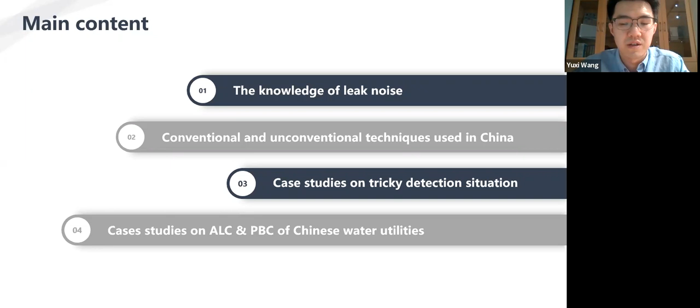So first section, the knowledge of leak noise. What's the component of a single leak noise? In fact, you can say it's kind of like a piece of music that's mixed up with all kinds of frequencies, from low frequency to middle frequency to high frequency.

As you can see from the diagram, it's composed of 4 parts. You will have some vibration from the pipe, water flow, and the impaction when the water jet comes up from the hole to inject the background soil. At last, you will have friction when the water jet is coming out from the hole—friction between the hole and the water body itself creates some noise. So basically, we have 4 types of noises that mix together to create a leak noise.

I'm going to show you 3 types of real leak noise. One is from the cast iron pipe, the second is from the PVC pipe, and the third is from the lead pipe. I'm just trying to turn down the noise so people can hear it clearly.

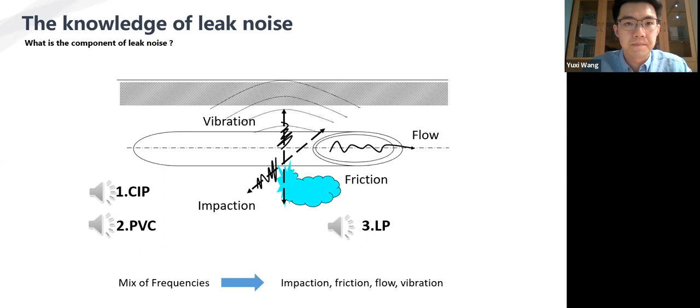To find the leak point, you have to use all kinds of tools to help you listen and find the leak noise. There are many parameters that have a main impact on leak noise. I list three main parameters.

There are water pressure, pipe material, and the third one is the burial depth. Those three parameters are, as far as I know, the most important three parameters that can affect the leak noise. From the left top diagram, as we know, the FAVAD N1 equation shows that when the pressure is getting higher, the leak rate is getting higher.

So we will have more or less a proportional relationship between the water pressure and the leak rate, and it's the same with sound intensity and water pressure. As you can see from this diagram, you will have a very steep gradient of increasing from 0.1 megapascal to 0.3 megapascal, and the leak noise will quickly become much louder. Until we reach 0.4 to 0.5 megapascal, it's getting slower. But overall, the sound intensity or loudness of the leak noise is getting louder when the water pressure is getting higher.

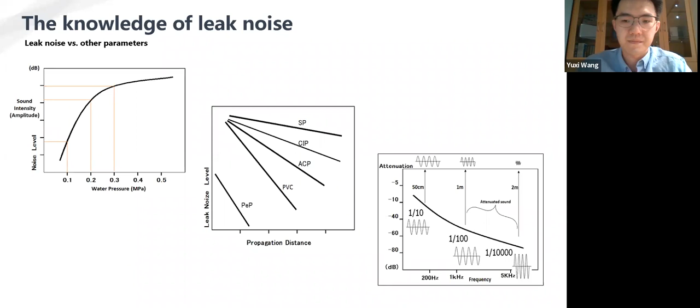When we try to pinpoint leak location, we will always encounter two kinds of noises as well. The first one is fake noise, and it will happen anywhere around the world. There are at least 4 fake noises. The first one is the power transformer, which is quite a common situation when we're doing detection activities in China. And we have water flow, and sometimes we can hear the water meter.

And there's also sewage sound. If the sewage is quite close to the water mains, you can also hear the sound from the sewage. So let me just show you the sound of each one.

This is quite common in China when doing detection work in living districts, where we have lots of buildings and apartments with air conditioners and other things, including the power transformer on the street. When we try to use the ground microphone to pinpoint the leak noise, we can actually hear exactly the same noise like this. But it's easy to cut off, because sometimes the main unit has a function, like a special filter, to cut off this kind of low pitch.

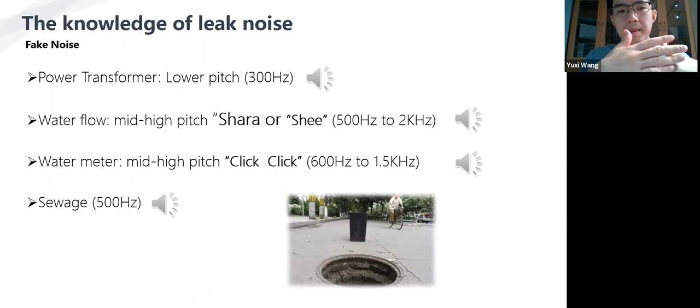So these are the 4 fake noises I listed on the presentation. In the real situation, there are more fake noises that we encounter during activities, but those four noises are kind of the typical fake noises we have in China.

So the second one is the mixture of leak noise and background noises. I have no idea how the background noise level would be in other countries, especially in European countries. When I was studying in the UK, of course, the streets were relatively quiet. But in China, as you see from the diagram, we usually do work during the daytime, especially in traffic jam time, and sometimes even at night after 12 o'clock, or theoretically between 2 and 4 in the morning, the most quiet time. The streets are still noisy in some certain areas. So we usually hear the leak noise together with background noises. It's always like that - we don't really hear any pure leak noises at night. There's always some dog barking, people walking on the street, or motorcycles coming through - all kinds of situations. So let me show you 4 mixtures of leak noises and background noises to give you some idea how the sound would be like under these certain situations.

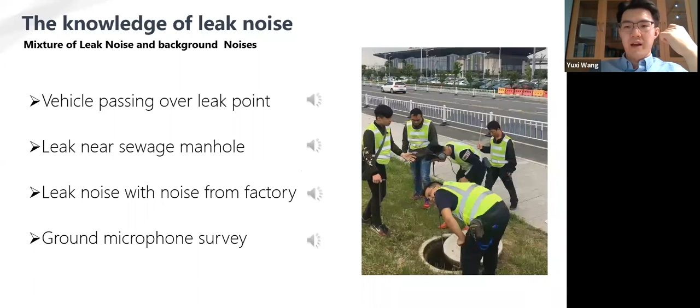So it's very clear that the closer you get to the real leak point, the louder you will hear it from your headphone. This is a very interesting sound clip.

So the second part, after talking about some basic knowledge of leak noise, we're going to present some conventional methodologies and tools, and also some unconventional methods we've used in China. Leak detection work in China can be tracked back to the 1970s, and the most professional, official leak detection work really started in the early 1990s.

Before talking about conventional methodologies, for every water leak detection job in China, we always follow 3 steps: the area survey, to find the leakiest area, and then the line survey, where we shrink the range from an area down to one pipe, finding all the leaky pipes and which pipe is leaking. And then at last, we focus on the point on the pipe. So it's like a zoom-in procedure, from the big suspicious area down to one suspicious point, and then we use special ways to pinpoint the leak and fix it.

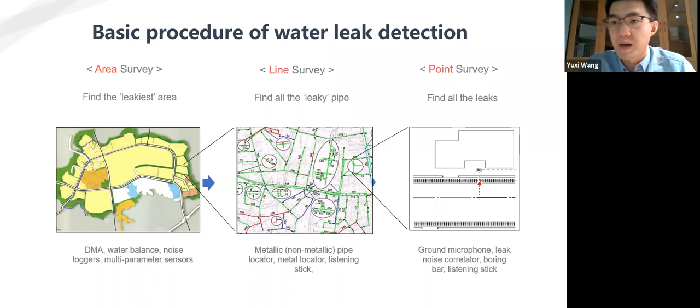I will talk about more during the boring bar slide, and also the boring bar will combine with the listening stick together to pinpoint the point.

For the area survey, we have tried the very classic lift and shift for the noise logging method, and it's still used in China at the moment. We basically install all the loggers on the pipe accessories, drive a car, and use a special receiver to receive these noise values. Then we go back to the computer to see which area is red, yellow, or green, and if an area has a leak alarm, we go and check.

It's good that when you have a relatively small block, like in Japan, to use the lift and shift, and also in the UK, or maybe in Singapore and Thailand, it will be very convenient because the entire water demanding area is smaller. So you can easily get those data by driving a car or something else.

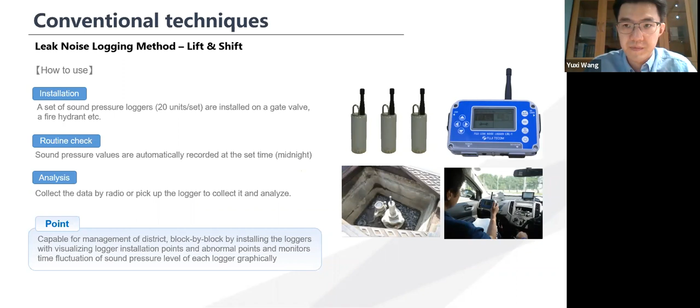But in China it's different. For example, in Beijing we used to deploy 3,000 loggers back in 2008 during the Beijing Olympic Games, but that only covers just around the Olympic Stadium. For the entire Beijing city, maybe we need 100,000 or more to cover it.

Considering the cost and also the driving situation in Beijing, the traffic jam, we tried the classic ways for many years, and we finally realized that maybe the traditional ways are not really suitable for China. So we developed our own smart method.

It's similar, we have the logger here, and we use two ways. We have NB-IoT, the narrowband Internet of Things, and we have a base so we can use it to transfer the logging data back into the computer. So there's no people needed to pick up that data.

Or we can use LoRa to get the data, and then it will automatically show on your pad or your iPhone.

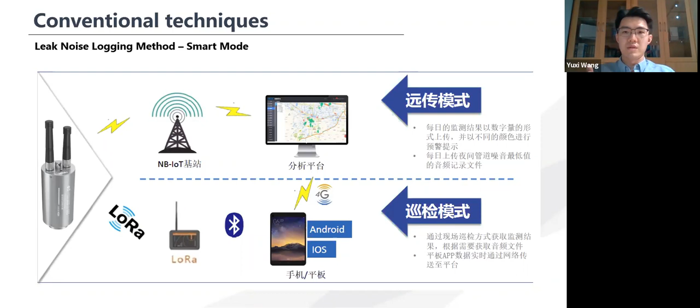Everybody is trying to use the 4G network because it's faster, saving more time to receive these noise logging data.

So when we define a leaky area, then we have to zoom into the pipe section. We use the listening stick, the manual listening stick, on the water meter, and we put it on the fire hydrant.

Sometimes in China, especially in the north and east area, we have very deep manholes. We have to use the ground microphone with a special magnetic pickup sensor, with an extended long wire to put the sensor into the manhole and listen.

Or we can use the extended listening stick. We sometimes have 4-meter long listening sticks specially designed for those ultra deep areas, and also the electronic listening stick, used to listen on water meters and other pipe accessories.

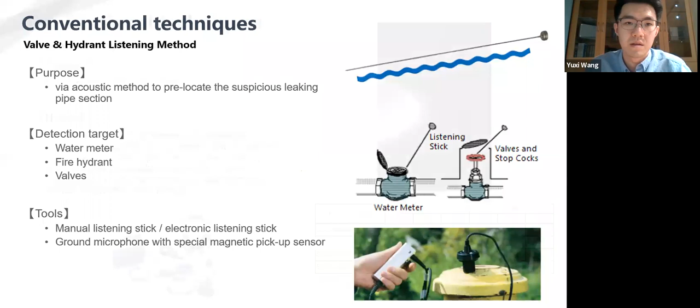So when we find the pipe section, then we have to use the ground microphone. In some areas in China, the water utilities don't use the ground microphone, they use listening sticks and leak correlators instead. They don't really trust the ground microphone.

But the ground microphone is actually very useful, and it's also frequently used in China. I can guarantee 99% of water utilities in China will have at least one ground microphone to do the survey. The whole purpose of using the ground microphone is to pinpoint the leak point.

Usually in night operation, for different pipe materials, the pickup point on the pipe is different. For example, if you have a PE pipe, the pickup point between each position is about 50 centimeters or even shorter, maybe 30 centimeters, because the noise propagation distance is very short. And if you have a steel pipe or a galvanized pipe, then you can walk longer, maybe 1 meter or 2 meters at each point.

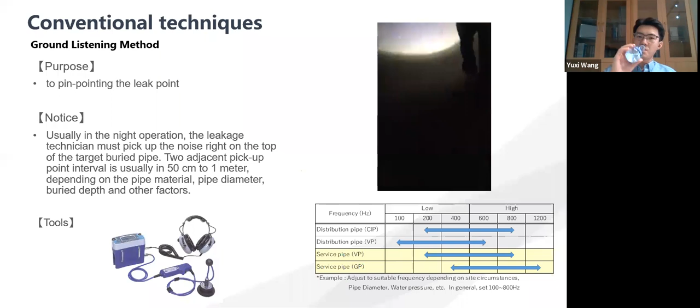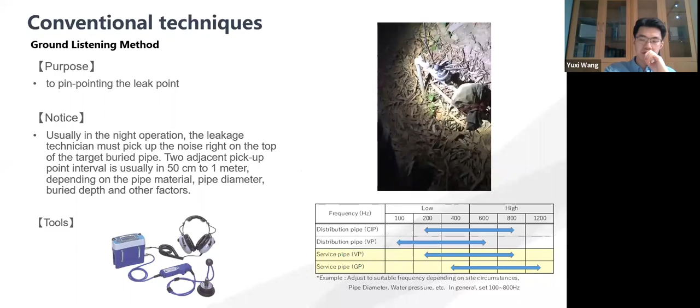The video clips I'm showing you now are at the normal speed of a proper Chinese leakage technician when he's doing the survey. It's not a show off. It's just the normal speed when the technician is so familiar with the area and also the leak noise.

He will work very fast to listen for the leak noise using the ground microphone. And you can also hear the dog barking. It's so common in China at night, so I guess the technicians are just so familiar with that.

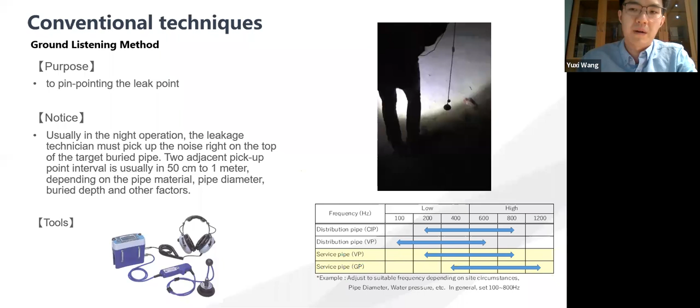You can hear me just chatting with him, and it's okay for him, he just walks and picks up the noise for 1 second and then walks along. The pipe material in this video is a galvanized pipe, so he probably has more confidence to hear it.

The other type of pinpointing the leak location is to use the leak noise correlation method. This method has been developed since the 1970s, originally designed in the UK, and then the rest of the world started learning this method. It's a very good method, but only when you have the correct pipe information. For example, you have to know your pipe diameter, you have to know the distance of the pipe section, and you have to make sure the noise can transmit to the two sensors.

Otherwise, there will be an unsuccessful leak correlation. Also, the situation where we use the leak noise correlator is when, like the pipe, there's a building sitting on it, or if there's an ultra deep pipe, or if there's too much background noise in your detection field, then you can use the LNC method.

There's one tricky situation when we refer back to the bottom diagram here about the correlation peak. For every type of LNC device, we will receive a correlation peak. Sometimes when we excavate, we will see a dry hole, and that's the situation when you will see a fake noise or a fake peak.

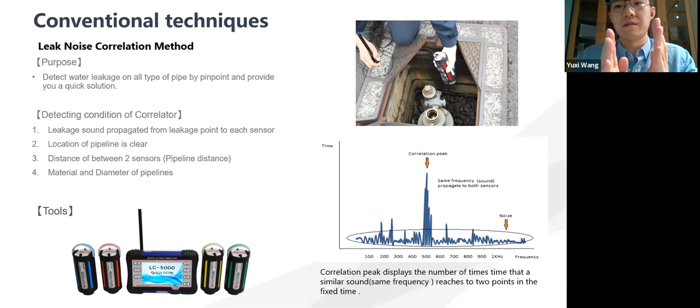So the boring bar method especially applies to in the northern part of China, from Shandong province or Henan province, and to Beijing, and going to the eastern side to eastern China. And some of you might know that in northeastern China, the pipe burial depth can be as deep as 5 or 6 meters.

And so under this kind of situation, even if you use the leak noise correlator combined with your ground microphone, sometimes you're still not sure if the leak point is there. And also because it's so deep, when we do the excavation, we spend more time and more labor force, and we have to dig a very deep hole. So considering all these situations, we decided to apply this boring bar method.

The purpose of using the boring bar method is to minimize the excavating area as small as possible. The reason Japan uses this method is because the block area there is very small - they have small streets. It's not like in China, where you find a point and then excavate like 40 by 40 centimeters or even a larger area. In Japan, it can't work like that. So they developed a method to minimize the area and save more time and labor force.

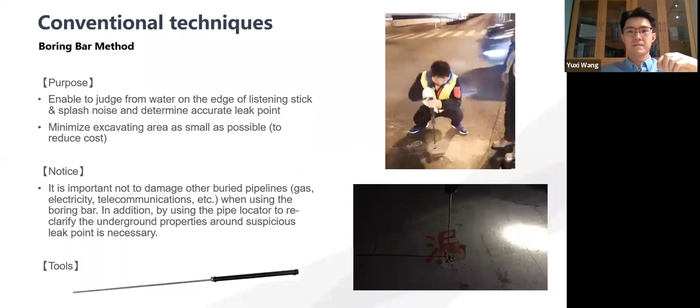So this guy is almost done with the boring bar method. Originally he should stand up and use the boring bar to push it down to get a hole. Just bear in mind that when he does this procedure, he knows how deep the pipe is. If you don't know how deep the pipe is, don't use this method, because you're going to break the pipe immediately.

So the second step is when we complete the borehole, we put the listening stick inside it. Let's just check.

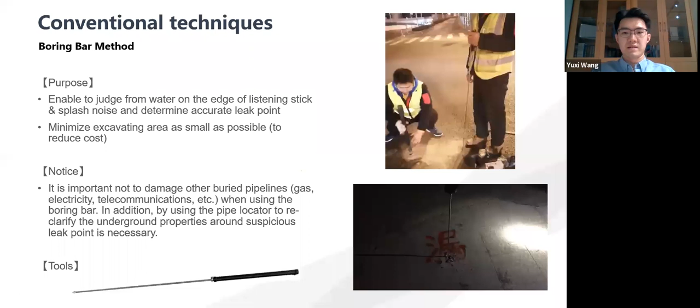So just to give you an idea, the Chinese word in the background means leak. You can see the listening stick is shaking under the high water pressure - this must be a leak point, and it's right on top of the leak point where you get the loudest noise. You don't even have to put your ear on the listening stick - you can already hear it through the phone recording the video clip. It's so loud you can't miss this point.

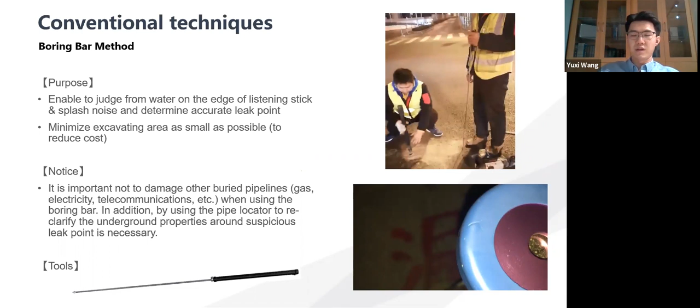So those four methods are the typical methodologies we use in China to find a leak point.

At the same time, we have also tried different unconventional detection techniques. The first one we tried is the Sahara. I first heard about Sahara back in 2015, from Pure Technologies. They've done quite a few case studies in China.

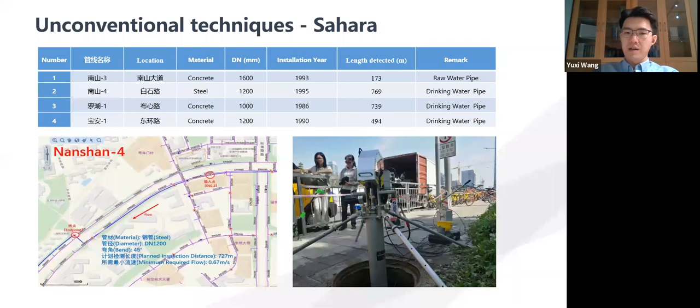This is one of the case studies in the Shenzhen area. You can see they did 4 lines totaling about 2.2 kilometers in length. The result is they didn't find any leak point, but they found a couple of butterfly valves and some blockage using this Sahara method.

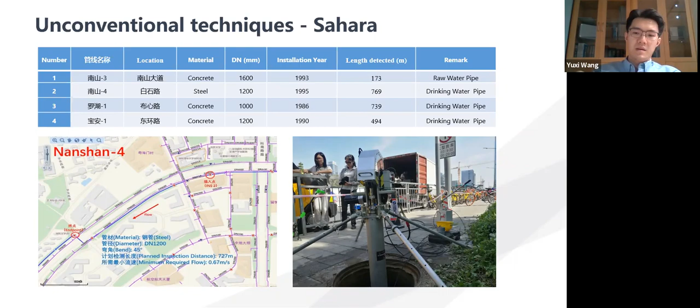And also at the same time, they tried smart ball. They find a couple of leaks, two leaks, and one leak is a simulated one, and they find it. They also find some airlocks or gas bags in the airlocks. They found a few of that, and this is also a very huge pipe, a DN 1400 water main. So they did a trial on that and found two leaks and a few airlocks.

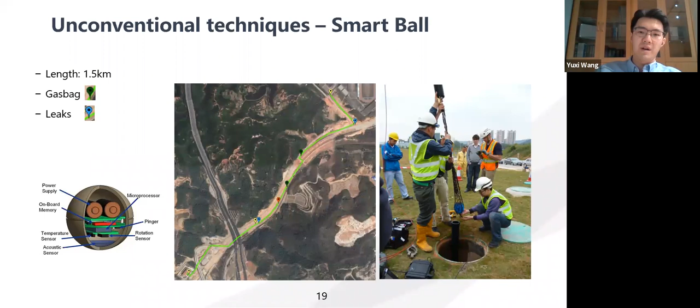And also for Sahara and smart ball, it's the same issues. First of all, it's the cost. I'm not sure how much money the European water utilities will spend on doing one smart ball or Sahara project, but in China it's very expensive. And to spend that amount of money and find less than 10 leaks, well, I can say the water utilities will not really accept that.

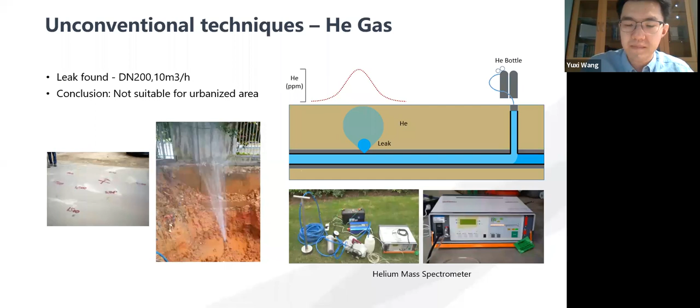So finally, there's the satellite. I've been reading some papers on satellite technologies. There's one company in Israel and one in Australia, I think. They both use satellites to detect the differences between the soil and... I forgot the term for that. But as long as you've got water on the ground, on the surface, you will have a POI, point of interest.

This method is totally a new idea, because they don't need DMA, and they don't really need to send people to do some kind of survey, because the satellite can do everything. But there are also some issues with the satellite. First of all, the range of the satellite is still too big. As far as I know, it's 200 meters as a radius. So when you have a radius like that, you still have to send people to walk around and do the survey to try to find the leak points.

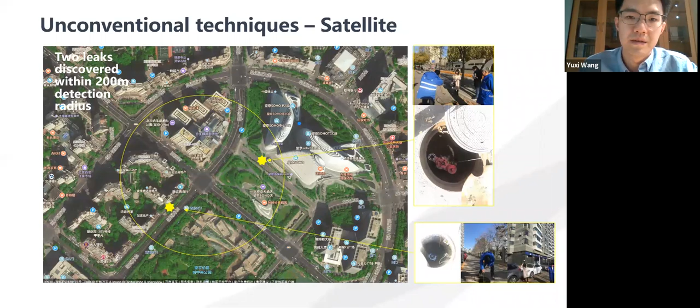So in China, I think there are more tricky situations than any other countries, because we have a large population. We have lots of construction work. Our street changes every day. We always see sometimes poor construction work, and also the background soil is not that high quality. So we have more tricky situations, and I'm going to show you 2 or 3 tricky situations we have, and it's very, very hard to find the leaks.

So large diameter, as I mentioned, it's tricky because the noise will not go very far. For this example, we have a 1000 reinforced concrete pipe, and it's relatively deeper, 2.5 meters. The reason I use this case study is not only because the sound propagation distance is short, but fortunately we have 2 pipe accessories on the water main, so we can use the leak noise correlator.

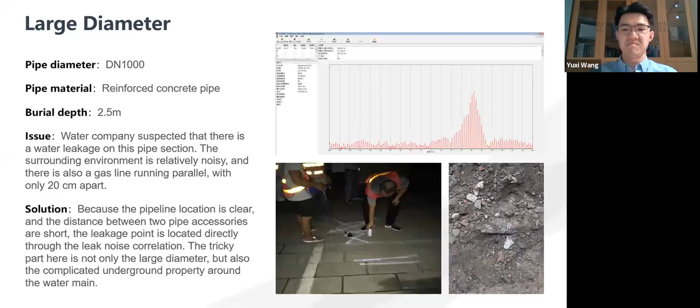And yeah, so it does. You can see the 2 lines here. This is actually the gas pipeline, and here is the leak right down there. So you can see how close the main pipe, water mains, and the gas line are. And this is the big point here, a very tiny leak point. This is how important it is to know what's buried underneath near your water mains. Otherwise, it's going to be a tragedy when doing the boring bar method, or even excavation directly. You will break the gas line, and then bad things happen.

And we have an ultra deep PE pipe. It's 8.1 meters. Believe it or not, it's really 8.1 meters deep. We also have a 7 meters deep PE pipe was found before. And why it's so deep is because of the backfilling of the soil. They dig out the road and then backfill the soil and then dig out again and then backfill. Several times of construction works. So the road is getting thicker and thicker and thicker. So your pipe is getting deeper and deeper because you got too much soil on top of it.

And the worst situation is this PE pipe doesn't have any tracer wire or any other traceable probes on the pipe. So basically we lost the pipe. We actually lost the pipe, and we can only see something or get some idea through the manhole.

So the first thing to find the leak is to find out the exact location and buried depth of the pipeline. So we use the copper wire with the signal rod, or we can say it's a Sonde, to make the entire pipeline traceable. So we know we are working right on top of the pipe, and we also know this is an 8.1 meter deep, very deep pipe. So it's going to be hard to pinpoint a point.

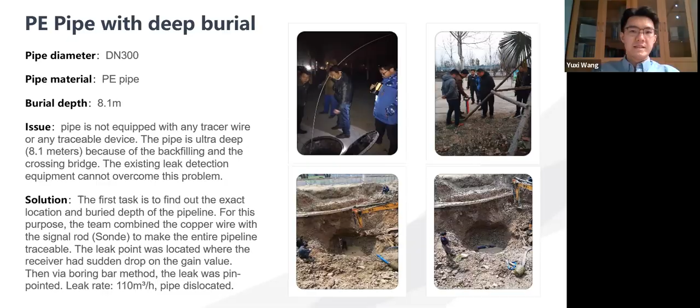And the last one is the pool leak. Thanks to Mr. Malcolm Farley, who explained this term to me because I didn't know the English term for this kind of leak. In China we call it mute leak, or pipe surrounded by water, but in English it's called pool leak. As you can tell from the term, it's a leak from the pool, so you don't hear anything from the situation.

This situation is probably the trickiest we have as a leakage technician. A pool leak occurs when you have low soil porosity, in a more muddy area. When you have a leak point, the water jet comes out but will not go through those soils because of low porosity and permeability. So you actually create a space which contains all that water in one area, and in the end it becomes a pool around the pipe, and you won't hear any noise.

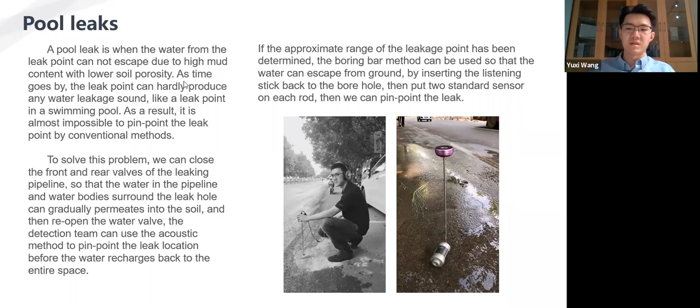At last, I'm going to talk about two case studies: one is the ALC one, and the other is the PVC one. The reason I didn't put too many case studies on water loss management and ALC is that other Chinese professionals will talk more about managed level regime, about how to control the entire leak rate and NRW rate. So let me just give you one example from Xiamen Water.

Just like what's done elsewhere in the world, we use DMA to find the highest possible leak area. You can see from the table here, we had an increase in minimum night flow, so the water company sent out 60 detection teams for surveying and detection. Each team had 2 or 3 persons, usually walking 3 to 5 kilometers per day on average. The plan was to survey over DN100 pipes within 2 days, and smaller pipes within 3 days.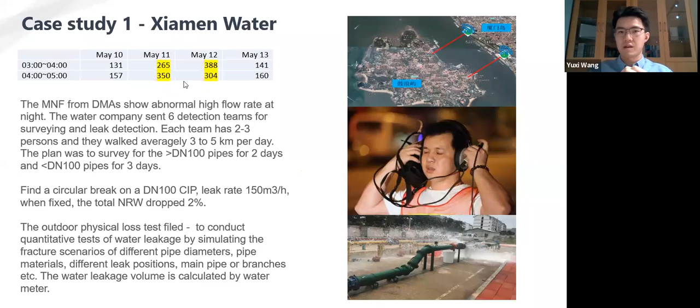For the performance-based contract, as far as I read from the IWA guideline, there are actually 4 types of PBCs, and in China we don't really have the first one, which is the longest, like a year or more, where we source professional technicians to help water utilities.

We don't have that complete one. We usually have the quickest one, where we sign a contract, find a leak, and then get money back depending on how much water we saved. Most of the time, we actually do this sort of PBC case study in China all the time.

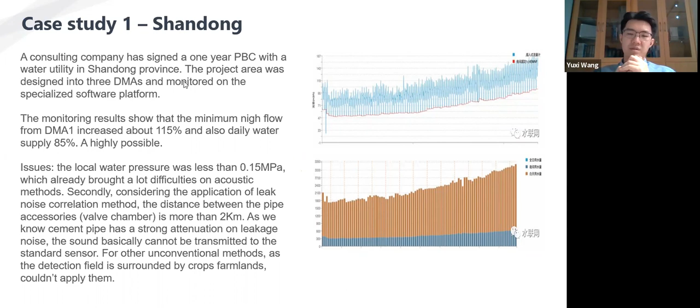Based on all those situations, in the end we went back to the basics. We used the classic listening method, the ground listening method, plus the boring bar method, to find the leak point by point.

Fortunately, the technician who did this work knew the area very well, especially how the pipe goes. So it was a one-night job, and then we found the leak—on the junction between the 400 main pipe and the DN160 branch pipe.

A huge crack was found, as you can see here on the pipe. It's probably due to poor pipe installation.

After the repair work, the minimum night flow decreased from 103 to 77 per hour. By rough calculations, 240,000 cubic meters can be saved annually.

We have a very cheap water price in China, so we can save 744,000 RMB each year from this. This is quite good, and this is for only DMA1—not even a full year—so it's quite an effective job to be done.

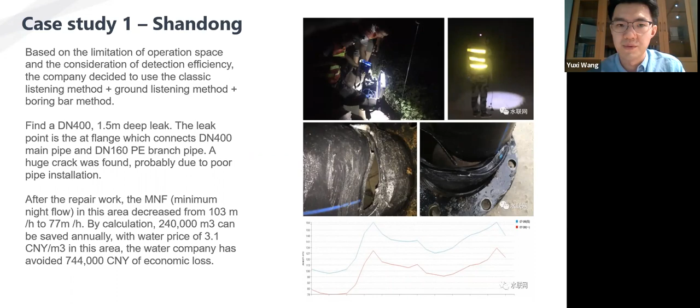So this is everything I would like to present to everybody.